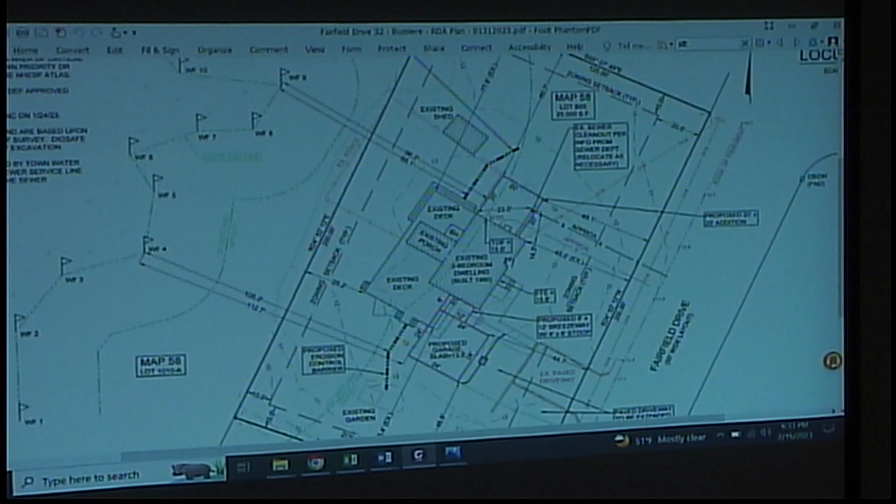Josh, any comments on it? None. I'm going to ask the commission. Nicole? No questions, thank you. Carol? No questions. Michael? The only question I would have had was what was the addition for - I just wanted to mention it, but I think you answered it already with the garage and the first floor bedroom. No, thank you. Kwame? No questions, thank you. Autumn, any questions? No questions, thank you.

Is there anybody in the audience that would like to question or comment on this project? I'm seeing none. I need a motion to close the hearing. Motion to close the hearing. Second. Motion and a second. All in favor? Aye. Aye. Opposed, abstained? None. Motion to accept the project with a negative 3 determination. Second. Thank you, I have a motion and a second. All in favor? Aye. Aye. Abstained? You have it. Please see Josh before you start any work.

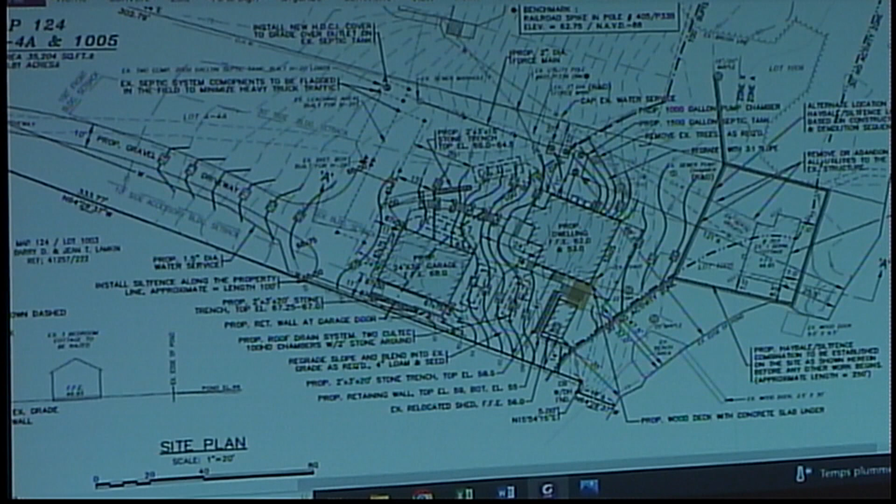I'm Bill Madden from GAF Engineering on behalf of the applicant. The project before you is a notice of intent for the construction of a new dwelling and a detached garage, as well as some site work, relocation of a shed, and demolition of an existing cottage down by the shore of White Island Pond. There's a fair amount of site work planned to accommodate the new house, including changing the grade to better facilitate construction. Everything slopes from Plymouth Avenue down to White Island Pond. We're reconstructing a portion of the driveway and adding some walkways.

We're providing roof infiltration for the roof runoff from the house and from the garage. There's a small shed that's going to be relocated down to the southerly end of the site. Once the new building is constructed, I think it's desired to remove the cottage at that time, though it may occur sooner. I'm not 100% sure on that, but that's essentially what the project consists of.

We will be providing a septic system tie-in for the existing house. The leaching field shown on the plan actually services the house to the north and this existing house and the cottage presently. When we discontinue use of the cottage, we'll remove the manhole, the pump, and the discharge line that goes to the leaching field, which will then be common between both houses - the one to the north and the one we're speaking of tonight.

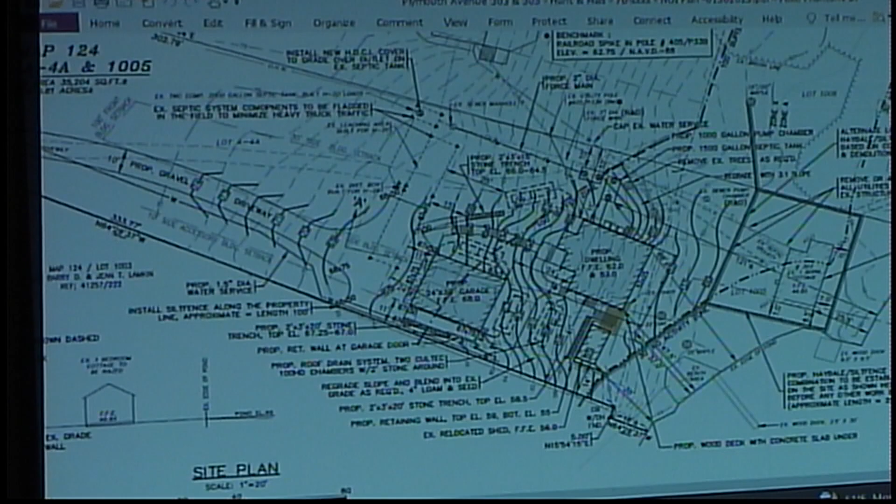We have a DEP file number on the project, and essentially the comment raised by DEP was that there was not a bank issued or shown on the plan. There is a bank, obviously, to contain the edge of the pond, but we're not going to be working near that. The closest work will be the demolition of the existing cottage, and we're not expecting that to have any impact on the bank. That's pretty much what I have to offer, and I'm happy to entertain any questions.

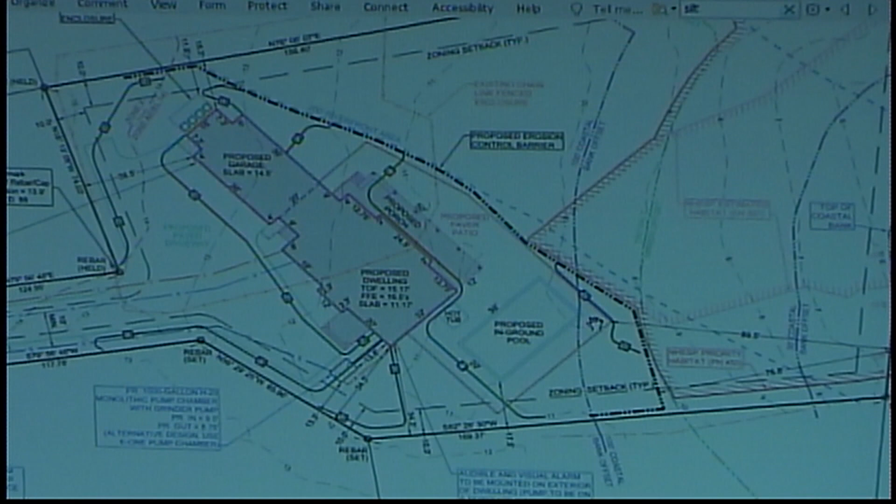There's very minimal grade changes proposed, just a little bit of cut in the location of the house for the crawl space foundation, and a little bit of fill on the driveway side of the garage. Current grades by the garage are about 13; we're proposing 14 to 14.5 right at the house, so at most about 1.5 feet in that location, and a little closer to 2 feet in front of the front door, which is the 32-foot wide box at the southern half of the structure.

Utilities, as I mentioned, are town sewer. This development was included with either the last Oakdale contract or the one prior - the most recent install. This portion of Johnson Street is low-pressure force main, so we're proposing a grinder pump that'll tie into the force main within Johnson Street. I think that pretty much covers it.

As you can see, most of the site being developed will be altered. The remaining site will stay in its existing conditions as it is today. Anything else? I think that covers it.

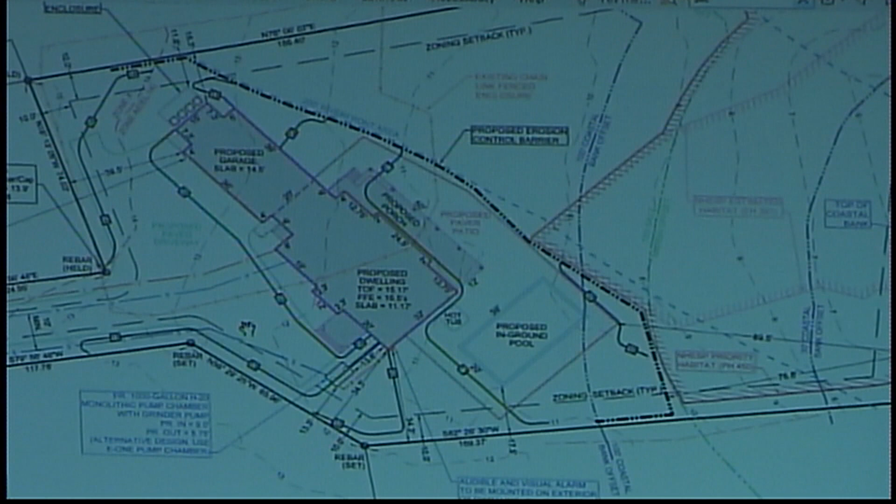All right, here's a question. How are you going to fill the pool and how are you going to empty the pool? Typical with most projects like this, due to the close nature of the resource areas, any maintenance requires it to be pumped off-site by tanker truck, maintenance performed, and then refilled by bringing water back in.

That is kind of a standard. I wanted to make sure that gets into the order of conditions, that this is not coming from town water. No, this will be a pump in and a pump out. No discharge. I just wanted to make sure it was clean. I think that does it for me.

Is there anybody that'd like to speak to this project? Mr. Lockwood, I know you're going to say I support this. My project, I support. Thank you, all right.

Ready to close? Move to close the hearing. Second. I have a motion and a second. All in favor to close the hearing? Aye. Aye. The hearing is closed.

Someone wants to take the order of conditions? I think we really just have two, and that would be the dry wells - the addition of the dry wells to the plan. We'll probably approve this tonight, knowing that you're going to give us an adjustment for the dry wells.

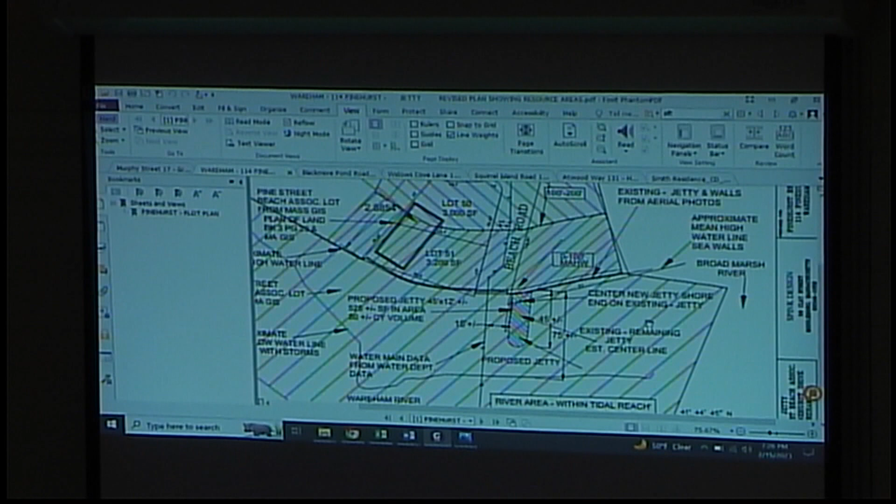All right, talk to us about this project. Well, there was a jetty once. The problem that has been occurring is that they did a rebuild of the wall. Is everybody familiar with the site, or shall I go through that description?

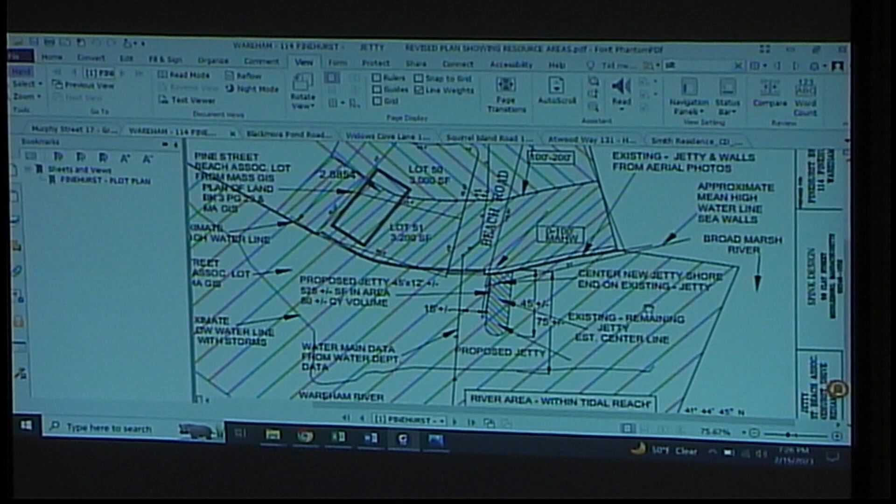We had a chance to visit it. Did everybody at least try to get down there and take a look at it? I did. Yeah, it's...

I'm not going to say ancient, but it's quite an old site for beach access. In the last few years, they've rebuilt the retaining wall along the front of the riverfront, and they have replenished the sand. Over the last few years, the sand has been moved by the flow of the river, and it's starting to undercut the bank and the wall again. There was a previous jetty on the site. We have pictures of it back to '74 that was there. The previous jetty was to the elevation of the high water.

Do you have a picture of that jetty that you could put up there? I cannot pull it up, no. I have no access to the server - hang on a second. Let's see if I... whoop, I dropped all of that, that's good.

Let me give you - do we have the green cards? Yes, I just dropped them on the floor. Oh, okay. Got the receipts and the green cards.

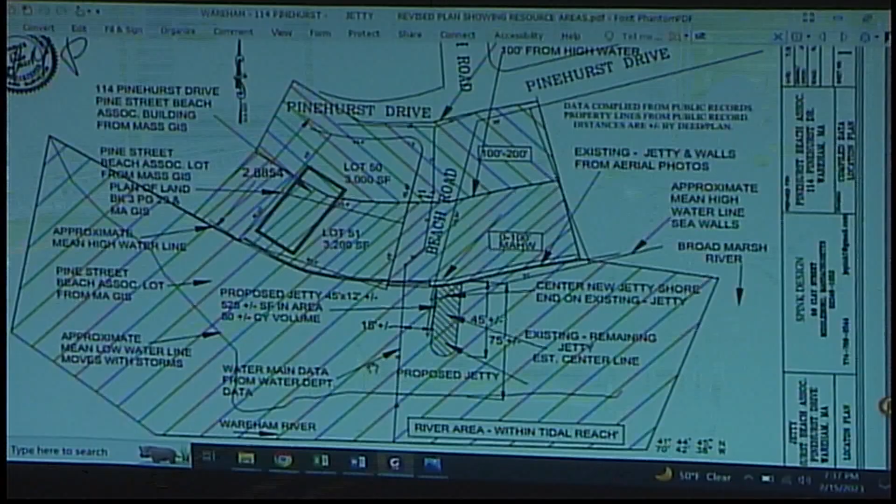All right, is there anybody in the audience who'd like to speak to this project? Because we are going to be continuing it, but you have something you'd like to add? Yes. Please come forward and identify yourself. I need you to get to a microphone. This one?

Good evening, Madam Chair. Elizabeth Lyden. I am an attorney representing 110 Pinehurst Drive. I am speaking on behalf of the homeowner who actually has not been approached about this project. She requested to speak to them and was denied that opportunity. We are asking to at least be able to see plans, and if the jetty is going to be attached to her wall, they'll need an easement and an access agreement to do the work. So we would request, I know that you already said you're recommending a continuance, but we would also recommend a continuance for this reason.

Is she on the abutter list? Yes. Okay, so she's been... It's her seawall that they're proposing to attach to, right? Yeah, it looks like it was sent to 396 Washington Street, Wellesley, Mass. Is that an address for you? Yes, was it sent certified? Yes. It looks okay, yeah.

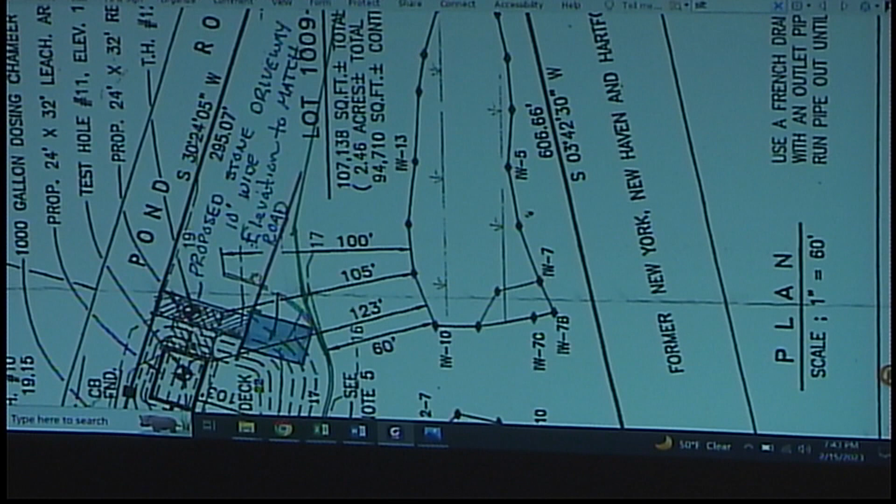Been out to this property before. We removed trees from behind the house because they were concerned about it, and there was one they didn't allow removal, and it almost hit our brand-new generator.

Open for questions. This was a continuance from our last hearing requiring abutter notifications, which we have since received. I'd recommend a negative-3 determination with one condition: that I go out and look at the trees proposed to be removed before you remove them. They're all marked, Josh. We also continued because the driveway wasn't staked out, and it's now been staked out, along with the proposed driveway area.

Kwame, any questions? No questions, thank you. Carol? No questions. Nicole? No, thank you. Autumn? No questions. Is there anybody in the audience who would like to speak to this project? I'm seeing none.

I move that we close the hearing. Second. I have a motion and a second to close the hearing. All in favor? Aye. Opposed, abstained, the hearing is closed.

I move that we accept this project with a negative determination number 3, with the condition that Josh be able to look at the trees before they are removed. Second. I have a motion and a second. All in favor? Aye. Opposed, abstained. So let Josh take a look at what you want to take down, and wait for the rest of the paperwork before you can start the project, but it's approved.

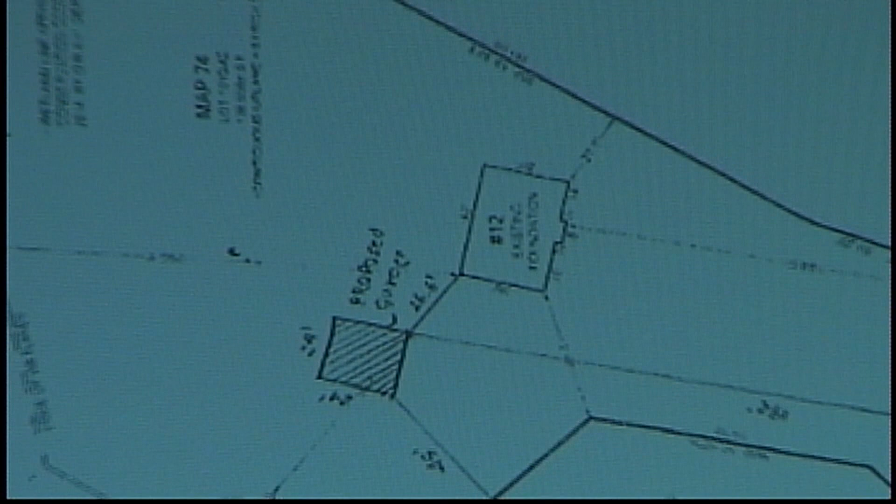We are putting in a well for the roof runoff. Looking at the plan, I'd say at least if you went in line with the corner of the house, somewhere up here, and then I think the wetlands come down this way, so on the corner. Because there's not much of a slope on that property, it's pretty flat, slight one, yeah.

So my recommendation for this project would be a negative-3 with the condition that the hay bale line be reconstructed, and if you could give me an updated plan on where the dry well is located. All right, yep.

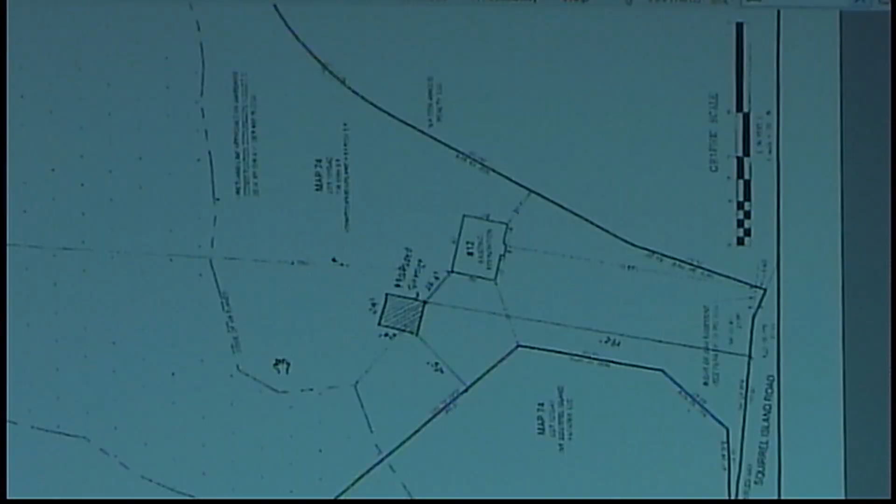Kwame, no questions, thank you. Michael, no questions, thank you. Carol, no questions. Nicole, no questions? Autumn, no questions. Anybody in the audience would like to speak to this project? I'm seeing none.

Motion to close the hearing? Second. I have a motion to close the hearing and a second. All in favor? Aye. Opposed, abstain. Hearing's closed.

I need a motion. Motion to accept the project with a negative determination number 3, and the condition that the hay bale line be replaced, reconstructed, and that the dry wells be added to the plan. That's the motion. Second. I have a motion and a second. All in favor? Aye. Opposed, abstain. Same thing - get your paperwork from Josh and don't start the project until you get it, okay?

Perfect, thank you so much. You all have a wonderful night. You too.

Next one, Stephen Hurburt, yes, I remember this one. 131 Atwood Way. Okey dokey. I'm Stephen Hurburt, the property owner. I'm Frank Gallagher, the surveyor.

All right, the abutters have been notified? Do you have your green cards? I didn't get any - I notified 4 of them and sent the thing to, I think it was Lakeville, but I didn't get any of the green cards back. You have the notification? Yeah, okay, that's fine. That means you made the attempt. Watch the wires. And that you are going to go out and stake the second trench, which has been done. Yep.

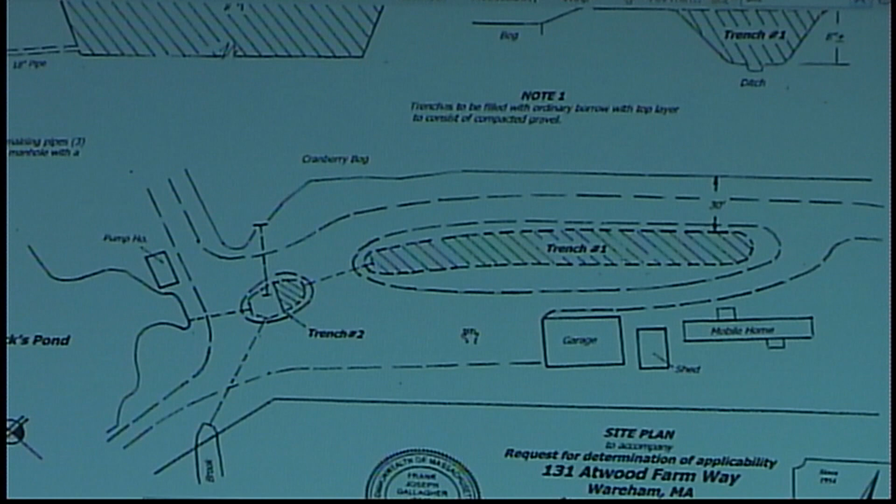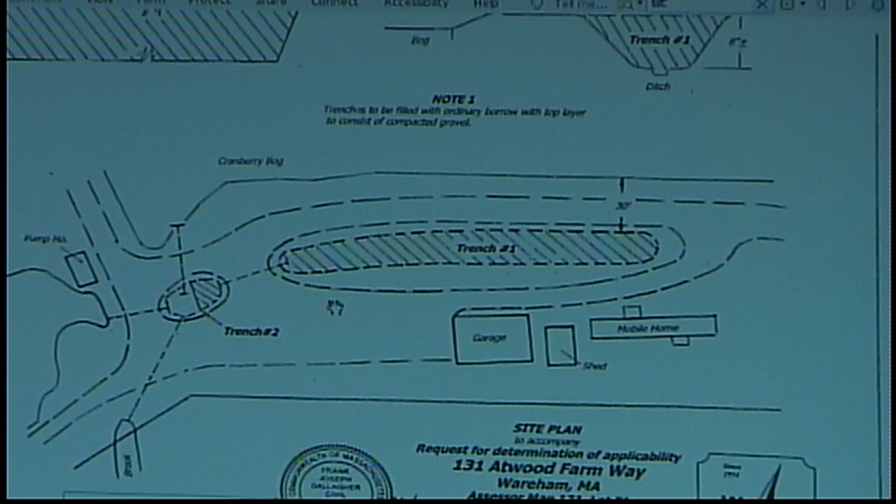Frank, Steve wants to talk to us about what we're here for. This was a continuation of the last hearing. We proposed to fill the trench on the right, the elongated one, and also a portion of the other one that's more of a hole than a trench, as shown on the plan. We're going to bring it up to grade so there's room for parking and turning around. It has been staked.

Josh explains this was another continuance due to an abutter notification. At the last hearing, this new plan was presented. The plan presented before did not include trench number 2. I'll leave it up to the commission on how they want to decide on trench number 2, but the original scope of work was just for trench number 1.

Questions? Kwame: I really don't have a problem with trench number 2, or trench 1, I would like to see this go forward. Carol, no questions. Nicole, no questions. Autumn, no questions. Okay, trench number 2.

You have a flow in and a flow out, but there is another pipe in that trench. At what point do you plan to fill in trench 2? Will you put in a concrete slab or something? Vertical slab, correct, before covering that old trench. There's a pipe in the middle of that trench 2 that's staying there, so you're filling closer to the right of that pipe. I can see the pipe indicated on the plan, so you're going to the right of it, putting up concrete and filling behind it.

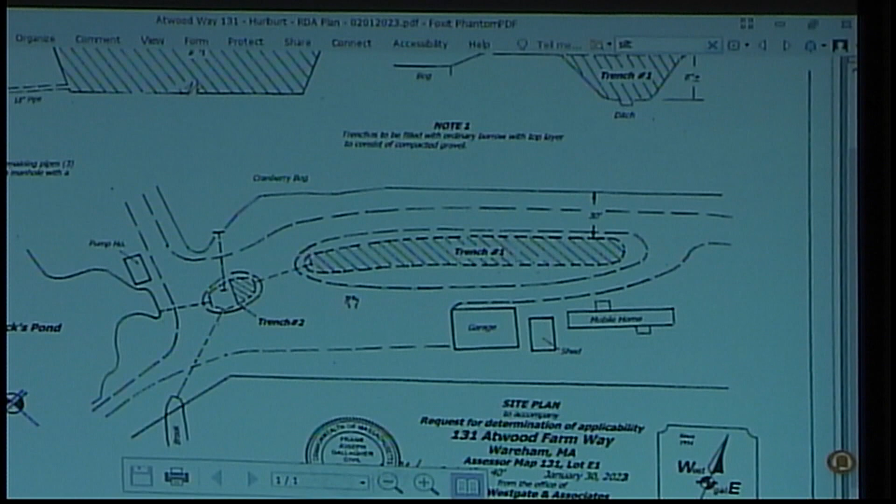We went around with questions already, but I have one now. Once you've filled in both trenches, are you going to put soil on top and plant grass, or will it stay dirt? There'll be 12 inches of compacted gravel on top, and then he may or may not pave it. We haven't talked about paving, I'm not paving because you're up against wetlands. Okay, Frank, no paving.

That whole area is just solid dirt. How much would it cost to pave? I'm not saying pave, I'm talking about maybe oil penetration, just like the remainder of the parking lot, so it'll all be uniform. That was my thought, not regular asphalt. I'm good with just filling it in, no asphalt, no oil, or anything else like that. It'll just be like everything else in that turnaround area in front of the garage.

Anybody in the audience speaking for this one? Seeing none. I'm going to say a negative-3, to add the addition of trench 2, just because I don't think it was included with the RDA application, so at least it will be on the paperwork. I inadvertently crossed it off and filled it in. I misunderstood. So with the -3, we'll add the condition that it includes trench 2.

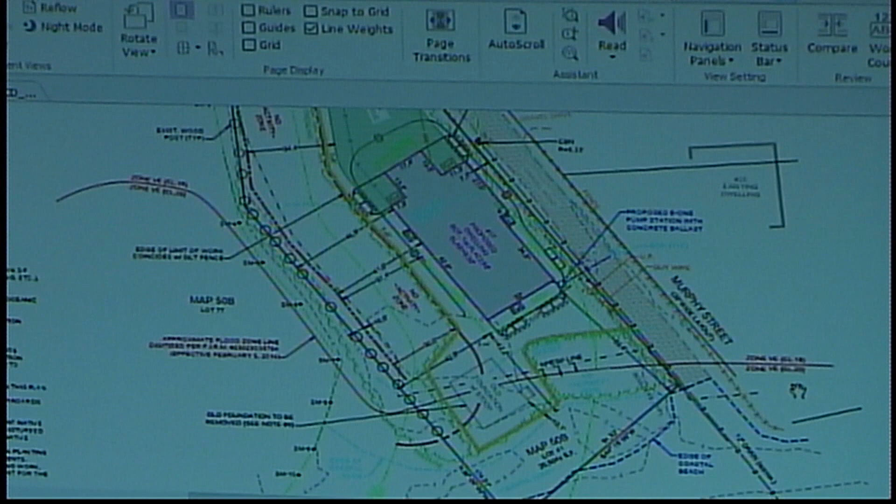Mike Pimentel, who you know, who's the engineer on this project, asked that I review all the information that's been submitted in addition to the plans and their notice of intent, and review the information that Dave Pichette, who I've known since he and I started around the same time in this field, submitted. Obviously on the consulting side and the regulatory side, I respect Dave very much. It's kind of sad to see him go.

So I was asked to go out and take a look at the site, which I've done on 2 occasions, really take a good look at the performance standards, as objectively as I could. What I produced for you is a letter that basically describes my project understanding, my assessment of the existing conditions, and then an opinion on the regulatory compliance aspects of the project.

When I'm working in coastal resource areas for projects, I very much rely on CZM's guide applying the Mass Coastal Wetland Regulations. It's that practical manual that CZM put out in 2017. That manual does a really nice job of laying out not only how you identify resource areas, which I think this project has done accurately—I don't think we're here to dispute the boundaries—but how projects must be designed in order to meet the regulatory compliance standards, specifically the performance standards.

So our 2 closest resource areas, other than the land subject to coastal storm flowage, are the low-profile coastal bank, which is on the west side of the project area, and the coastal dune, which is a low-volume, low-profile coastal feature on the south side of the project area.

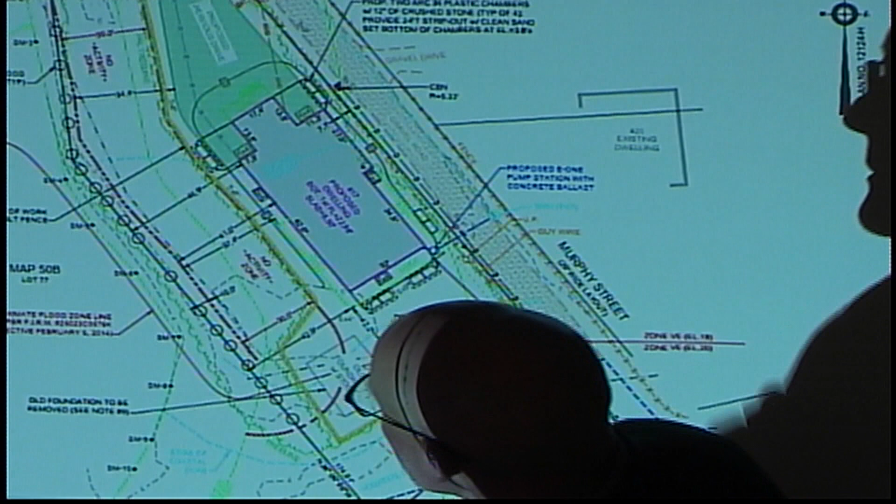Okay, Kwame? Just looking at the plans, I'm not sure if this is all in detail, but where's the capture for any dry wells? Yeah, it's a little hard to see. Those are little squares? Yep, correct, that's red. So it's like one, two, pair there. Gotcha, that's the thing I was looking at. It was like two Arc 36 plastic chambers. I figured that's what it was, but that was my only question.

Thank you. Michael? Refresh my memory, this house is on stilts, correct? Yes, that's all, thank you.

It's VE 18 and 20, so we're talking really up there. Yeah, when we went through the zoning board, this is just information for the board, we actually moved over, the original plan that we got approved through the zoning board wasn't so close to the road. So if you choose to approve this, I'm going back to the zoning board to ask for a minor modification because of the importance of moving this house away from the coastal bank. Right now it's 7 feet from the road, we had it conforming at 10 feet. I'm going to ask for a 3-foot minor modification. That's the importance of us trying to do the right thing and get as far away from the resource areas as we can. So you do have zoning approval? We do have a zoning variance, correct.

So I would go back for a minor modification if they saw it was major or minor. Sorry, I interrupted, Michael, anything? No, I actually said that was all, and then you started talking. No, I didn't interrupt at all. I'm sorry, maybe you started asking questions yourself, I don't know.

Carol? Yes, I do have a question on the plantings. You're going to be putting in native plants. Native. Will you be removing the invasives? I don't think that detail is provided, but that certainly could be conditioned, that's a common condition in doing restoration, if you can eradicate what you have for invasives, I think it would be a really good idea.

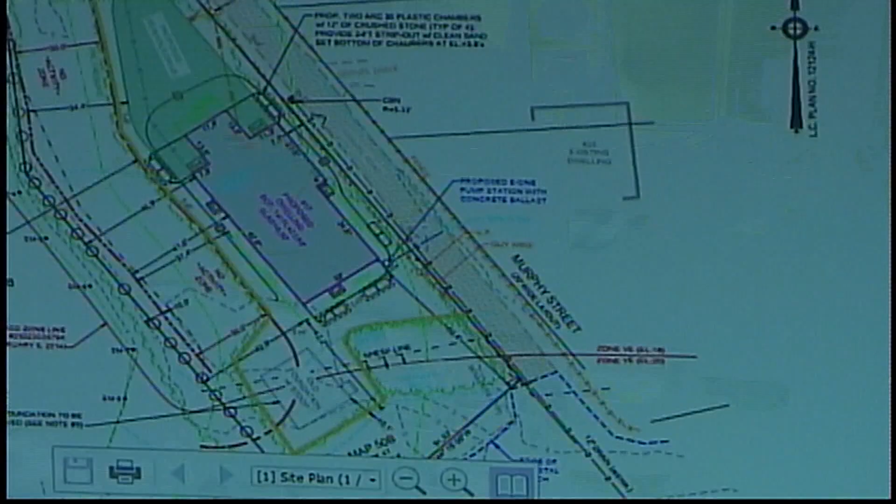Okay, so we have a lot of no-touch zones in here. We have the 30-foot no-activity zone, which is the red line on the west side of the house. We have a 30-foot no-activity zone across the coastal dune on the south side of the house - the light blue line. At what point do the red line and the light blue line come together? Then you've got 7 feet from the house to the driveway. Is there a line in there? I don't think there's a no-activity zone in there.

My concern is that we must be able to preserve this no-activity zone, so I was looking for some type of fencing - split rail, probably the best thing - to go along that whole line to define the no-activity zone from the water side and the dune side. That means the nice little cut everybody uses as a shortcut will no longer be available, and the dune will be able to fill in where the walking trail had been for a long time. I'm concerned about removal of vegetation.

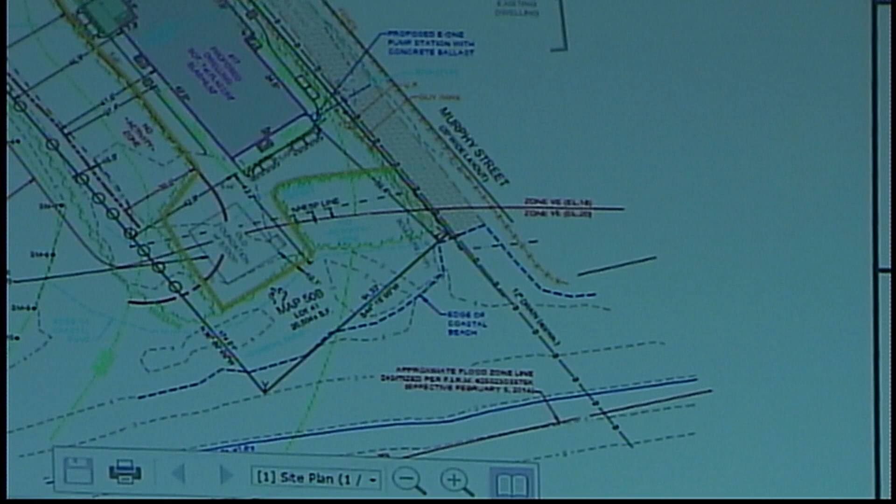We talked about what to do about these invasives that are in that dune, 30-foot dune zone, and the foundation to be removed. The property next to you found a way of getting rid of every tree between their porch and the Buzzards Bay view, all the way down to the river. I don't want this happening here. When you have trees to remove for the foundation and building of the property, I don't want it clear-cut between the deck and the water. I like my privacy, and the house is going to be up high enough to see. We're going to lose all those junipers and stuff like that, they're going to be gone. I think that was it, and the dry wells, thank you, Kwame.

Anybody in the audience would like to speak to this project? Yes, please come forward and identify yourself. You're probably the abutter I mentioned. My name's Tony Petrucci, no, I'm not that abutter, I live on Bond Street. I am in full support of this project. That's it. Okay, full support, thank you.

If I may, one more time. Yes, Josh. I think there's a good opportunity here to remove all the invasives and maybe better the vegetation on that bank. In my conversations with Mr. Green, I think he's in support of having it be as natural and vegetated as it can be.

I would suggest to the board that maybe we close the hearing tonight and allow me some time to work with Mike to come up with a planting plan on how we can remove the invasives and add more natural growth into this property. Then with a new plan and proposed planting plan, we can make our motion to approve and condition at our next meeting, knowing that once we close the hearing, we have 21 days. Correct. Okay.